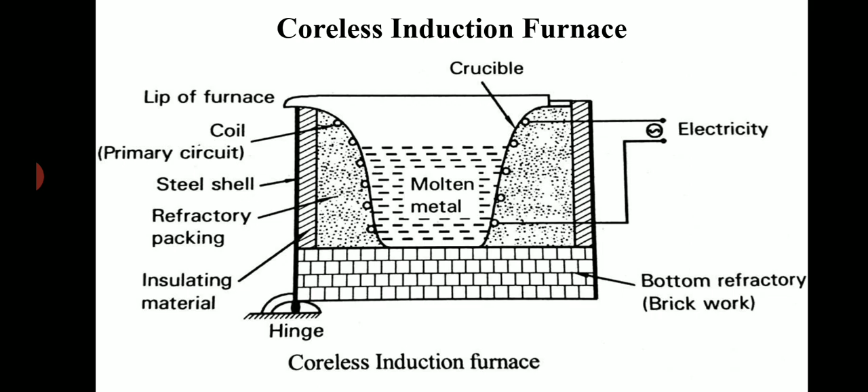Constructional features. The furnace consists of an outer cylinder steel shell and is hinged at the bottom front side to facilitate tilting for pouring. The inner surface of the shell is covered with mica or asbestos and the bottom surface is covered with refractory bricks. Next to the insulation layer, hollow copper tubes are present for the entire height of the shell. These tubes carry current and are water cooled. A layer of insulation is provided to the coils.

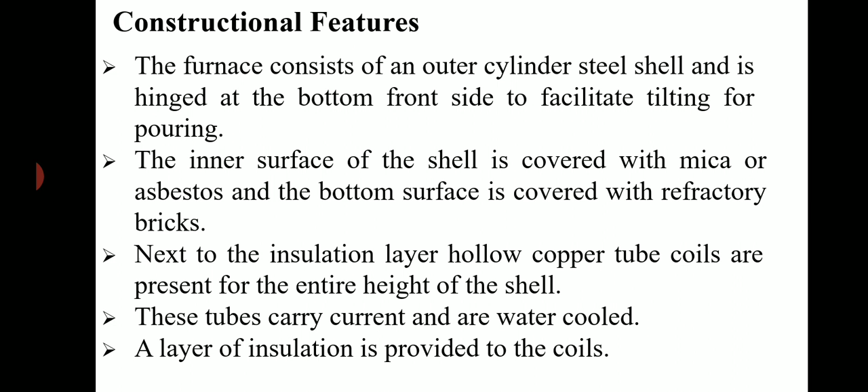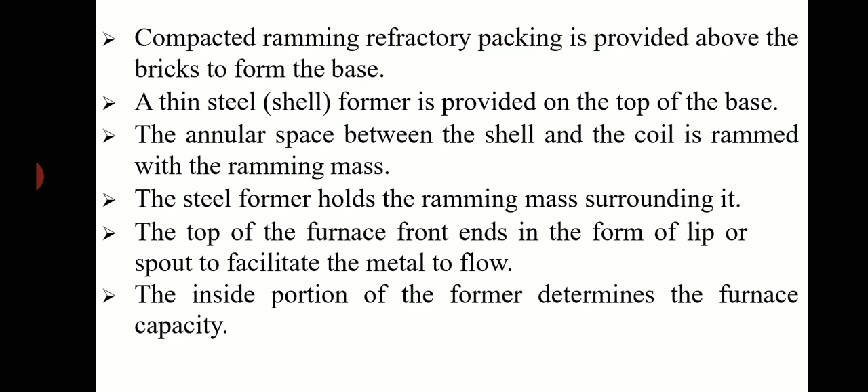Compacted ramming refractory packing is provided above the bricks to form the base. A thin steel shell former is provided on the top of the base. The annular space between the shell and the coil is rammed with the ramming mass. The steel former holds the ramming mass surrounding it. The top of the furnace front ends in the form of lip or spout to facilitate the metal to flow. The inside portion of the former determines the furnace capacity.

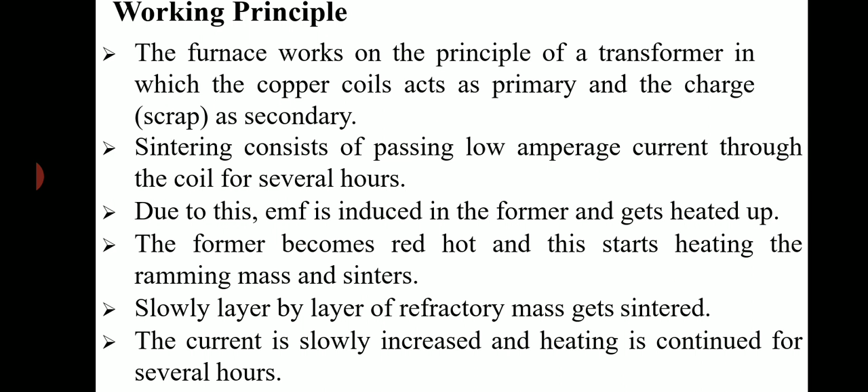Working principle. The furnace works on the principle of a transformer in which the copper coils act as primary and the charge scrap as secondary. Sintering consists of passing low amperage current through the coil for several hours. Due to this, EMF is induced in the former and it gets heated up. The former becomes red hot and this starts heating the ramming mass and sinters it. Slowly, layer by layer, the refractory mass gets sintered. The current is slowly increased and heating is continued for several hours.

Loose, thin scrap is slowly charged into the crucible. The scrap slowly starts melting and a liquid metal pool is formed. After some time, molten metal starts stirring, and the stirring action is due to the eddy current induced in the metal, which will be flowing opposite to the direction of main current. The stirring action or churning ensures homogeneous molten metal. Necessary alloying elements can easily be added. The charge needs to be properly selected since slag removal is difficult due to stirring action.

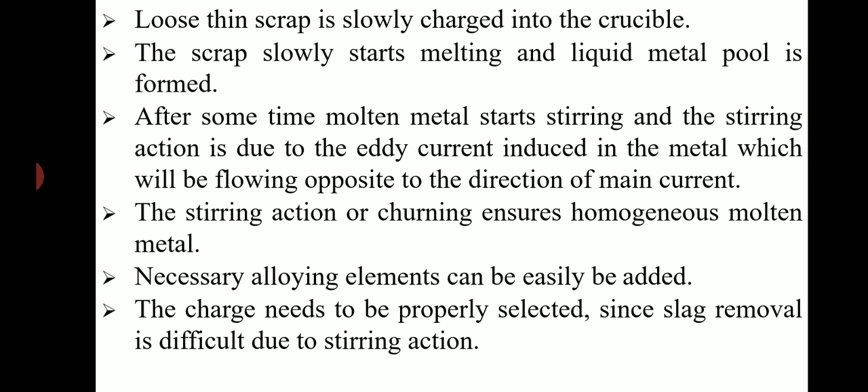Electric arc furnace. It is a versatile furnace used to melt mainly steel. It makes use of electric current to generate the arc in the metal. The arc heats and melts the charge. Melting using electricity as a source of energy is more common. This is because electric furnace provides more flexibility and cleanliness in operation. These are suitable for the production of high quality steels. There are two types of electric arc furnaces: direct arc furnace and indirect arc furnace.

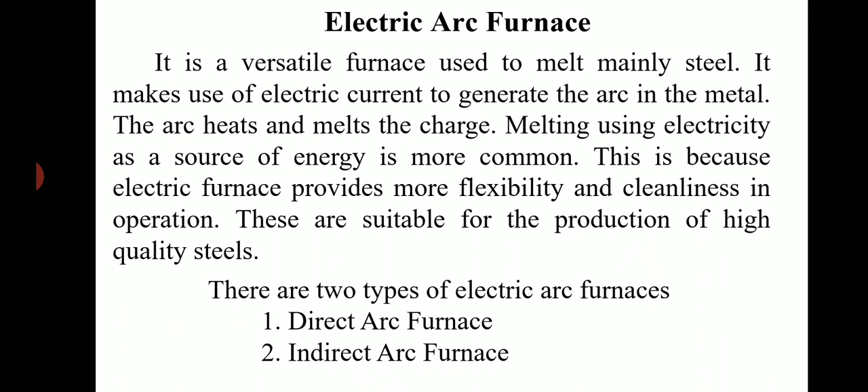Direct arc furnace comprises of three-phase power supply, graphite electrodes, magnesite brick, slag door, magnesite brick, rammed hearth, steel shell, and pouring spout.

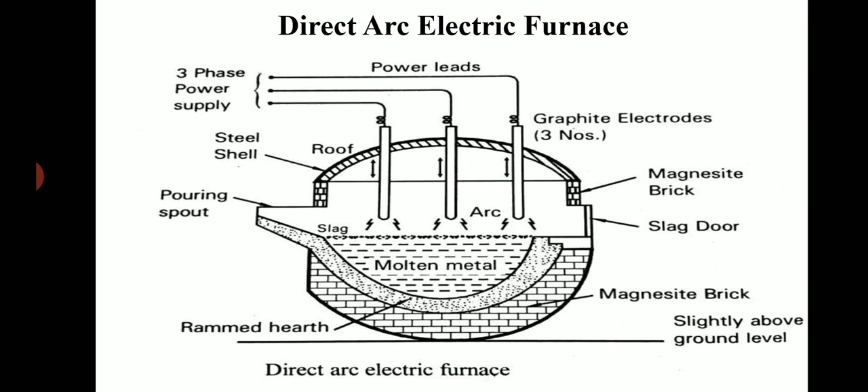Constructional features. Used to melt mainly steel. Dish-shaped steel shell that forms the main portion and where melting takes place. The inside of this has refractory lining of magnesite bricks. This can be either stationary or tilting type. The dish sets on a semi-circular gear arrangement to facilitate tilting of the furnace by 40 to 60 degrees. It can be tilted backwards by 10 to 20 degrees to remove slag.

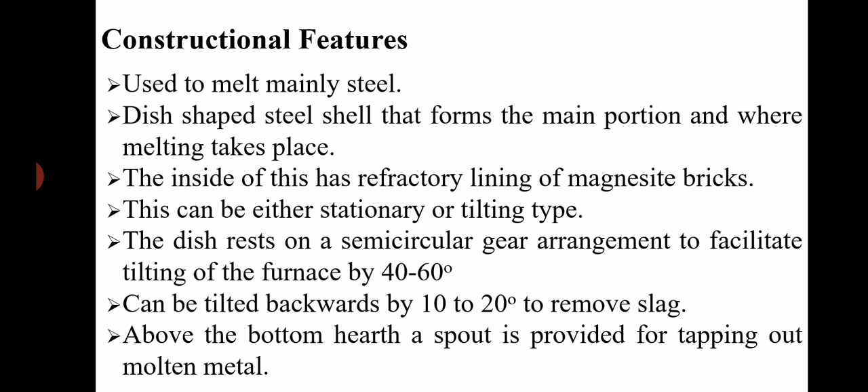Above the bottom hearth, a spout is provided for tapping out molten metal. While tilting for the metal to flow into a ladle, a pit is made to rest the ladle. Diagonally opposite to the spout is a small door opening to facilitate the addition of alloys and removal of slag. The graphite electrodes enter the furnace from the roof. The electrodes are raised and lowered by means of guides and are usually water cooled to dissipate the heat. Metal can be charged from the furnace roof.

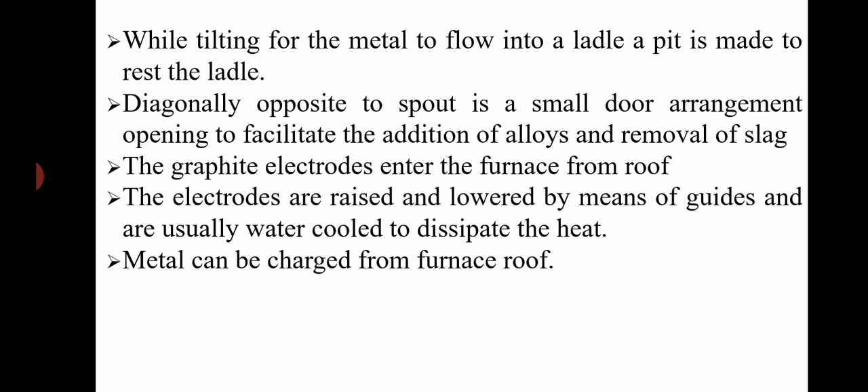Working principle. It works on the principle that when an arc is struck between the electrode and the charged material, heat is generated due to the resistance of the metal charge. Burnt lime with coke is supplied to the furnace and continuous arcs are generated by the rods and thus heat the molten metal in contact. Necessary current and voltage are supplied to the electrode by a control panel. The gap between the charge and the electrode is maintained in order to produce an arc.

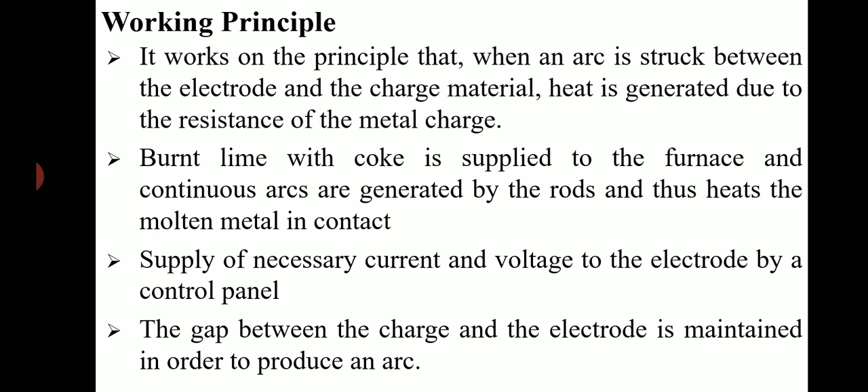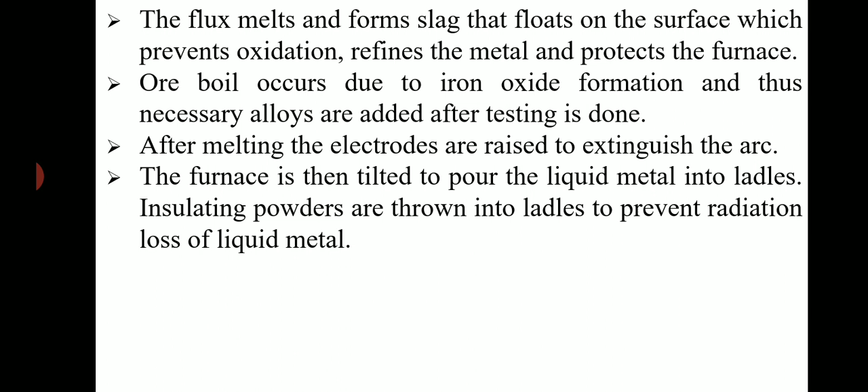The flux melts and forms slag that floats on the surface, which prevents oxidation, refines the metal, and protects the furnace. Ore boil occurs due to iron oxide formation and thus necessary alloys are added after testing is done. After melting, the electrodes are raised to extinguish the arc. The furnace is then tilted to pour the liquid metal into ladles. Insulating powders are thrown into ladles to prevent radiation loss of liquid metal.

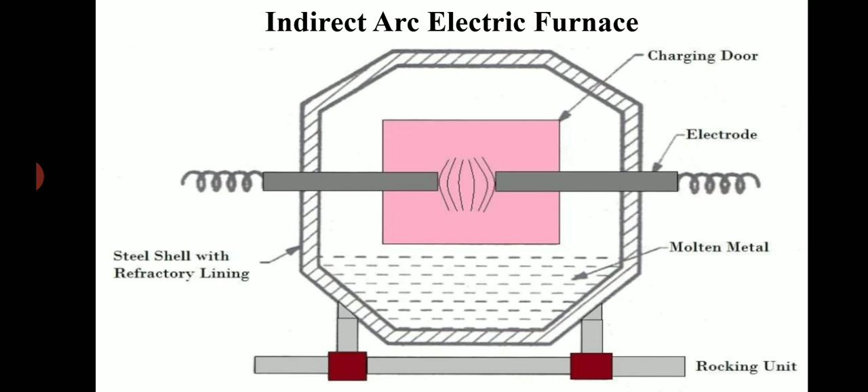Indirect arc furnace comprises of charging door, electrode, molten metal, rocking unit and steel shell with refractory lining. Constructional features: the furnace consists of a cylindrical or barrel-shaped shell lined with a refractory material. The shell is mounted on rollers and can be tilted through 180 degrees. This facilitates easy pouring. Also, the rollers provide rocking action to the furnace that speeds the melting rate. Two carbon electrodes are mounted along the horizontal axis and can be automatically adjusted for maintaining proper arc column. A charging door and pouring spout serve their purpose.

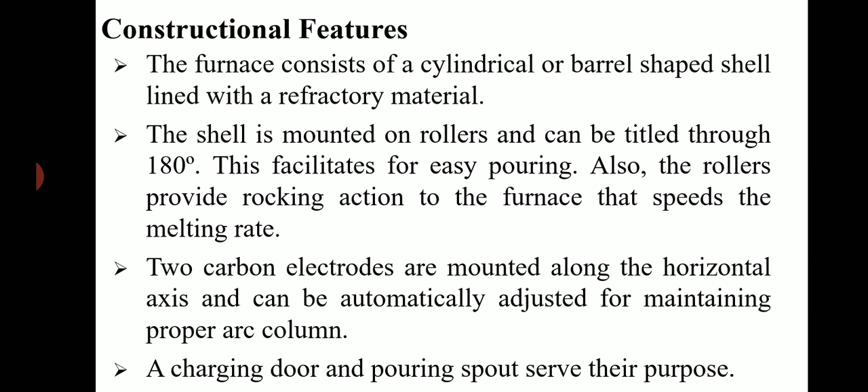Working principle: the ingot steel scrap, alloy metals and fluxing agents are charged into the furnace. On supplying the necessary current and voltage, an arc is struck between the two non-consumable carbon electrodes. The electrodes are brought closer together and maintained so that the arc remains between them. The charge melts by radiation from the heat produced by the arc and also by conduction from the heat absorbed by the refractory lining.

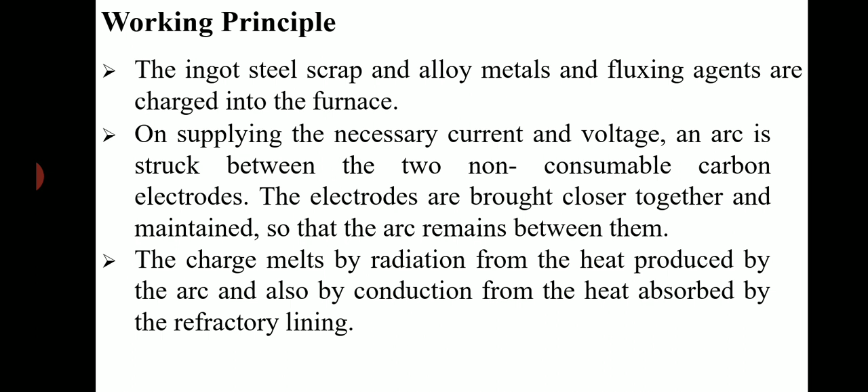Once the metal melts, the furnace is rotated, set to rock to and fro. This helps the refractory lining to get heated up and also exposes the molten metal to a larger area of the heated lining. Rocking stirs the molten metal homogeneously. When the liquid metal reaches the desired temperature, the furnace is tilted mechanically and the metal is tapped in ladles and poured into the molds.